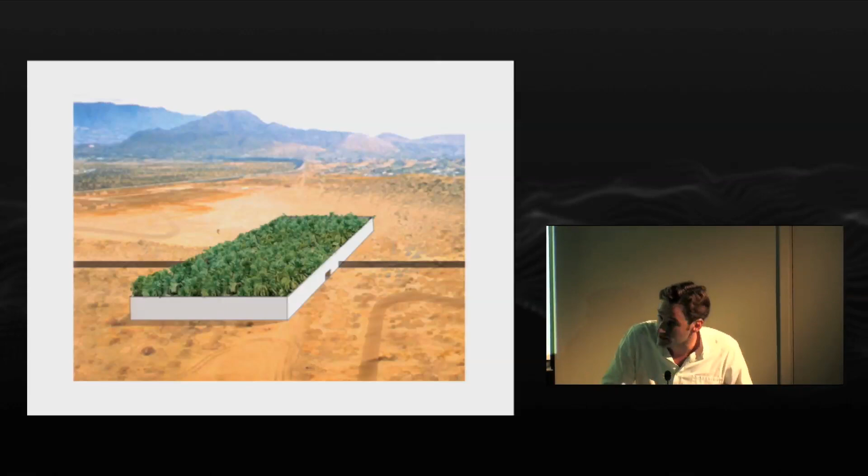So our proposal is very simple. We make a break in this fence and make an even higher wall as a perimeter surrounding a no man's land, the no man's land which always exists between two countries, and where you have one entrance on one side and one exit or entrance on the other side.

And basically it's a wall surrounding an oasis, a grid of palm trees that give you shade. It's also about being very humble and very pleasant. Imagine that space where you would normally wait and queue with your passport being checked. That could happen in the shade of the palm trees in an oasis. We call the project Border Garden,

and it also refers in many ways to almost traditional cities, like in Algeria, the M'zab, where you have the city but also the garden of the city, which is a walled entity, a garden where the minimum of water is used with the maximum effect to really create this lush oasis.

And so, in a way, it struck us that this could be, as a plan, also something relating to the landscape it stands in, this Tex-Mex desert, relating to it in scale, and by making a high wall, higher than the original fence, you could make this space for a border crossing. A question that is mainly infrastructural, you could say. It's interesting to think of infrastructure as being space as such.

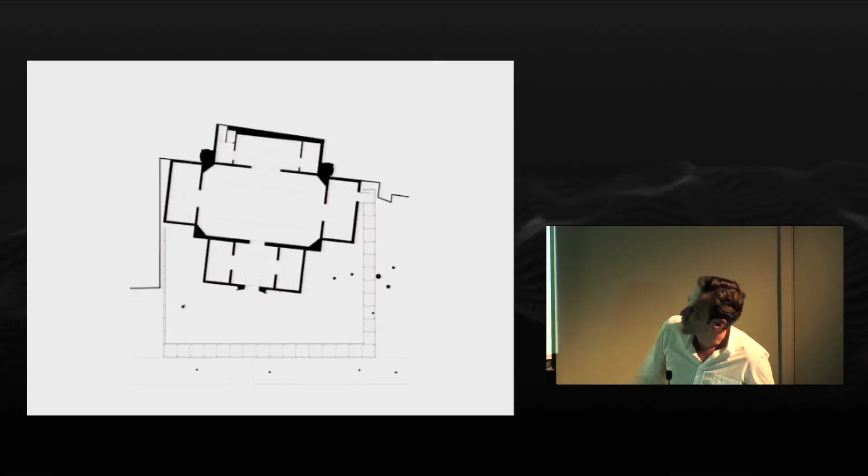It blocked the main entrance to the Giardini, and it made a new entrance. So the door you saw before is there, and you would go through the wall, and I'll tell you about that later, to enter the existing pavilion, come out, and discover a new patio garden.

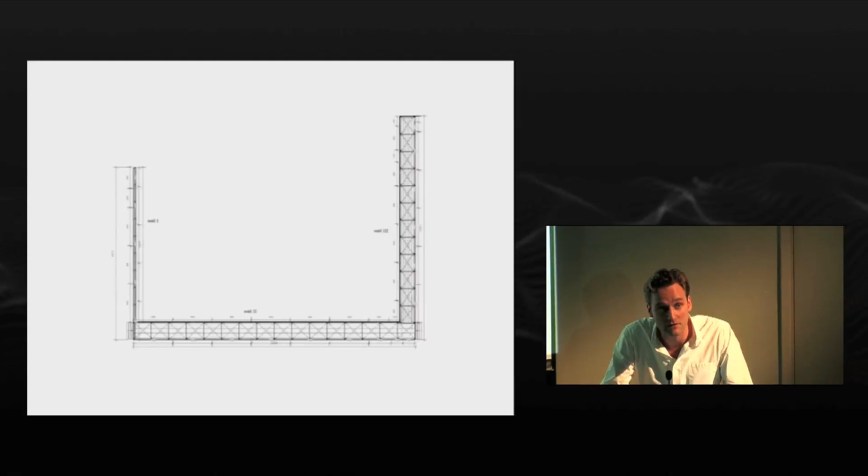And for us, it's very important to say that even if you make an installation, because this is an installation, temporary, 3 months, even then, we think you should make architecture. It should be precise, it should not look temporary, it should be a project really considered down to the detail, as if you would make an architectural project that would last forever. So this wall we made is 7 meters high, and the longest side was 30 meters, I think.

We had to make it there in real. And after the competition, we had to be realistic and really get that ambition that we put forward, get it done.

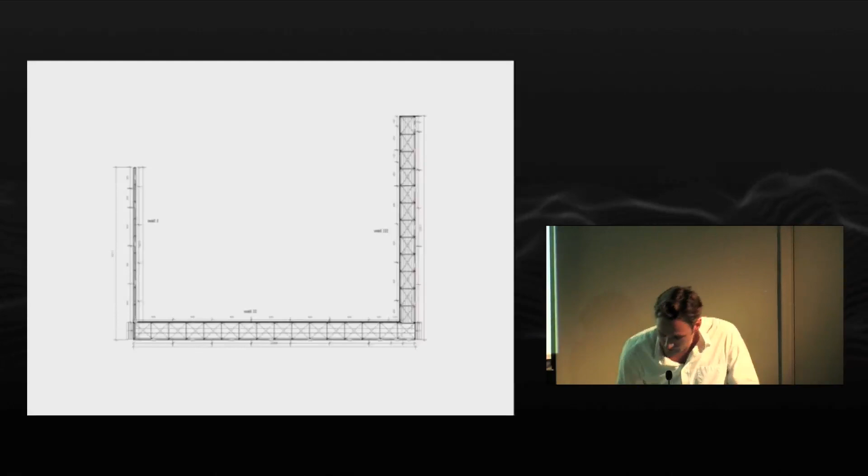And this is a wall we made out of scaffolding, not just any scaffolding. We were in Italy a lot these days, and Italy has beautiful scaffolding. Like Italian cars, they make also beautiful scaffolding. And so we discovered this around all these monuments in Venice and Rome, and the scaffolding was amazing. We decided, let's do it with the scaffolding, but let's make a piece of architecture out of it.

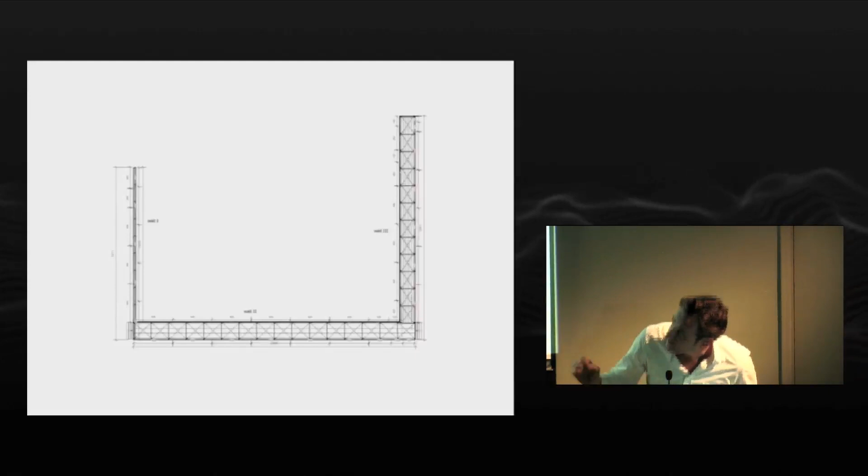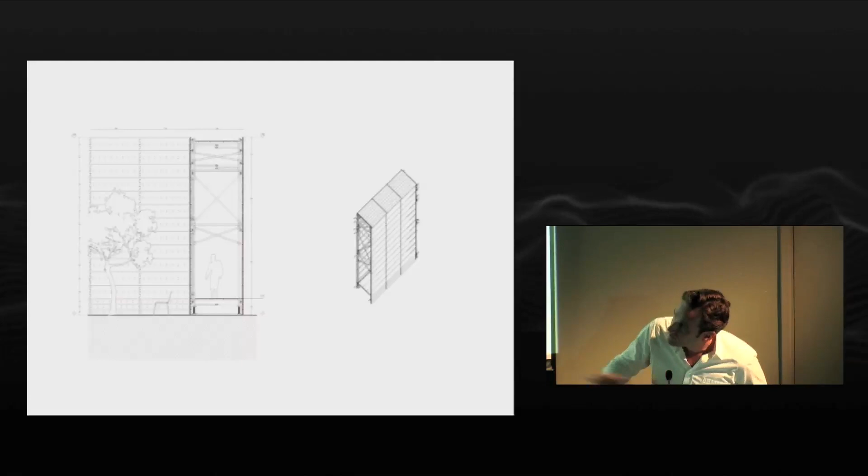And this is the plan, or let's say the modular plan of the scaffolding, making a wall which has a thickness which you can walk through, which becomes also the real entrance to it, but which then has been dressed by these walking boards, which are normally used for the scaffolding to walk on. These galvanized steel walking boards became also the final cladding or facade of the structure, making it into this box.

And obviously this thickness of the wall also provided its stability towards wind and so on. This is the inside image of the wall. And after walking through that wall, you would come in this space, a set of spaces just empty, nothing else except for space. Openings, white walls, chairs scattered around, and confetti on the floor. And walking out, more confetti.

This confetti, it's a funny anecdote, but within that whole new project for the Belgian Pavilion 2010, we were looking for a pragmatic solution to cover the complete floor of the new pavilion, and how to do that in a temporary way, not to get extreme and make a new floor. No, we were wondering for something that you could throw out and it would make a new floor, and confetti came. And in a strange way, and that's maybe important to say, it also finally gave the title to the project. This project was called After the Party.

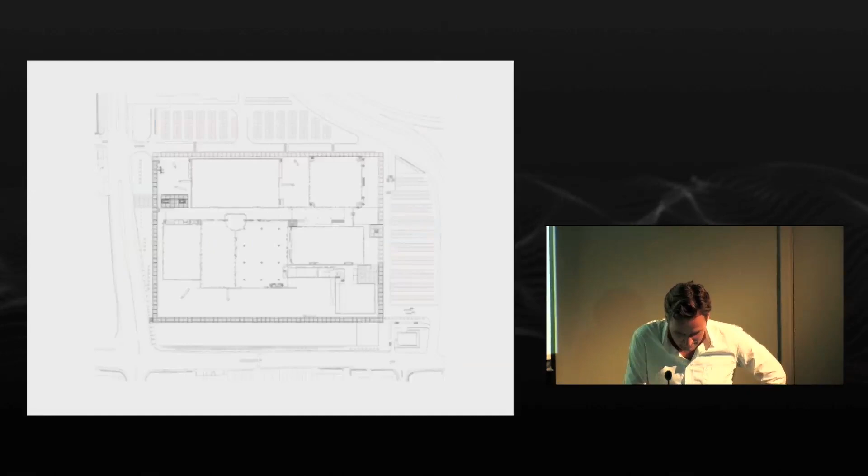That line, if you can see in the plan, is something special, in the sense that this whole complex has been built on a grid size of 5.70 meters, so 5 meters 70 centimeters by 5.70, and this is invisible in the whole building because you add facades and thicknesses of whatever, and you just have a bunch of boxes, right?

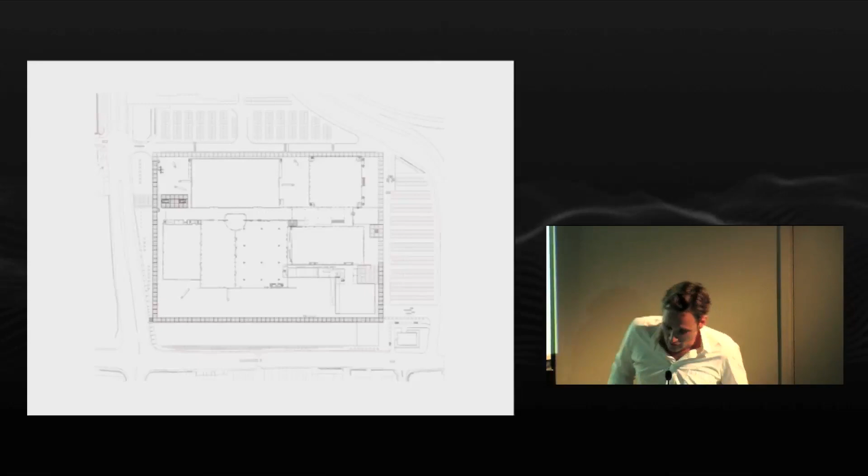So what we decided, it was quite beautiful as an idea that, even from the 60s on, you build a complex always on the same grid, but still you wouldn't see it. So what we decided is, let's make a ruler against that system, or along that system, a ruler of 5.70 by 5.70 by 5.70, all the time repeating this dimension, and putting a column at each of these coordinates on

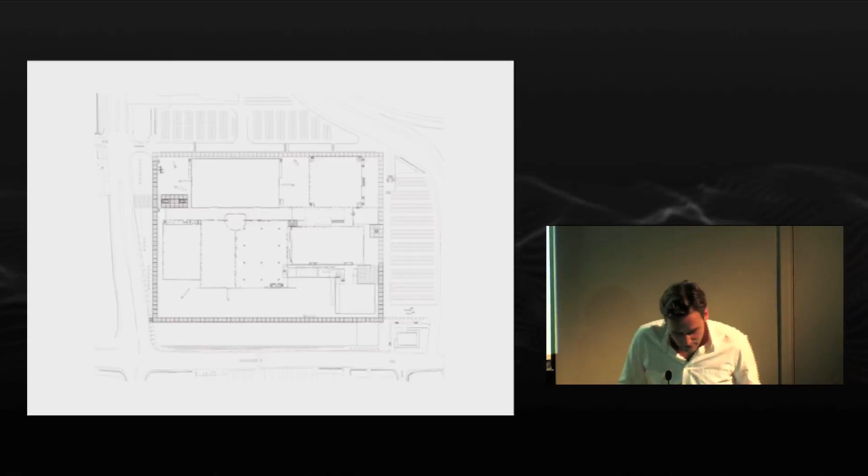this line. So these are all units of 5.70, but here, since we made a gallery just to walk around the complex and to make that frame, we didn't need any insulation or whatever, so we could just make it as pure as just a column. And it somehow measures the complex. It is an inverted gallery, where a gallery normally looks towards the square, or the public space it embraces. This one looks out to the city,

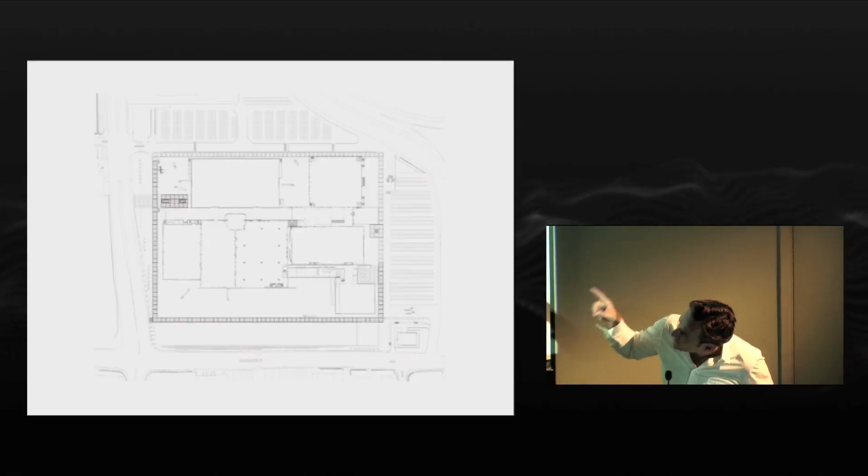and it has a certain transparency going in. So you will see in the pictures here, there's screens hanging in the back, and there's a green area which has also been completely redone together with Bas Smets, actually, landscape architect. But apart from being a line where you can just walk in and which somehow arranges that site, it's also a very dubious line, because obviously when the big fair comes and needs to put extra tents and so on, they would end up in the grass.

But why not? It's almost like a city wall where in the end, when the circus comes, they put the circus outside the city wall and no problem. So that line, you have to also understand as something which is not that strict, and the actual ambiguity of that is very important. Till it even becomes a building where you could buy tickets, entrance.

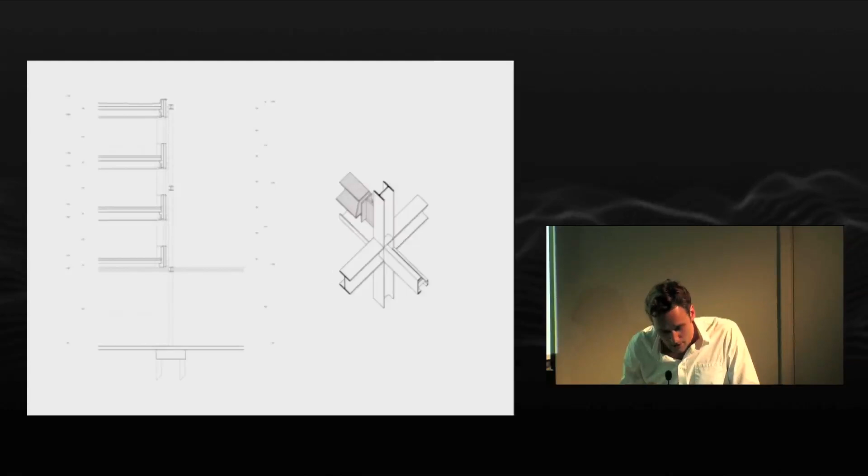And that building, as you can see here, there's the gallery, and at some point they asked, there's extra programs, so what about this extension? There's a new box, the new hall they built, they made new flat plateaus to build up tents and so on, but also offices. And offices, we put them on top of the gallery with this kind of detail. And in this unit system of 5.70, we somehow could fit 3 floors. So one beam is in front of the windows here. And this is the south entrance of the complex, underneath here.

The north entrance is due to get also a similar building, but then standing straight as a tower. But then again, maybe it's not so much about that. It's really about creating frame and content. This perimeter framing in very different ways, very different situations. This is also a hall that we have built behind the perimeter, because that's where you could still build. But it's just part of the set of halls. It doesn't have extra architectural value apart from being at the right spot.

Okay, I'll maybe have to speed up a bit.

Belgium also, a house. Belgium, and it's maybe good for you to know, Belgium is a very densely populated country. There's 10 million people or a bit more. And especially Flanders is quite a small area with 7 million people, something like that. And so space is really, we're running out of it. And each person has the dream of having a house, a single family house, a villa with its own terrain, and that's what's obviously taking away all that space. So there's endless suburbs in the whole of Flanders. Actually, it becomes almost a continuous city.

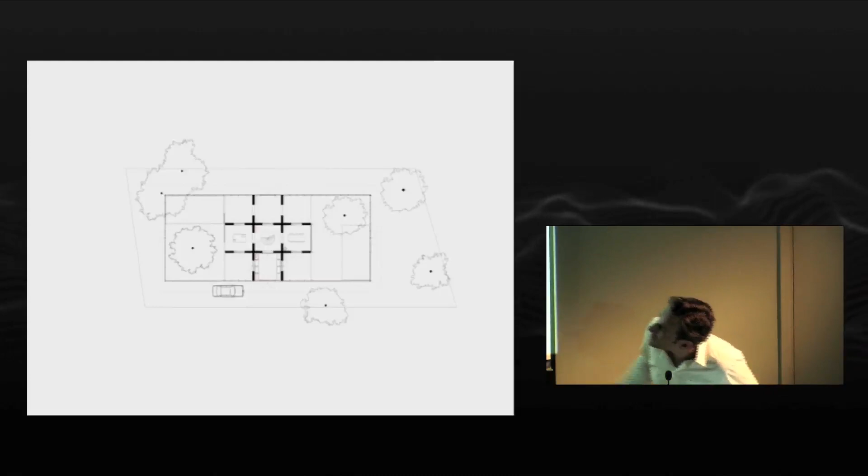In our idea, we wondered if it couldn't be interesting to give back, in a way, a piece of the site and put a fence as the first house inside the terrain. So this is the private property, almost giving back to wilderness, let's say, a part of your own site. So the perimeter defined on this lot is actually the fence, but also already the house.

And you could almost, as in Villa Savoye, drive around it as on a little farmer's road and go back out. And the actual door of the building would be on the side. You had two entrances. One is a back entrance and one is a front entrance, but they're both on the side.

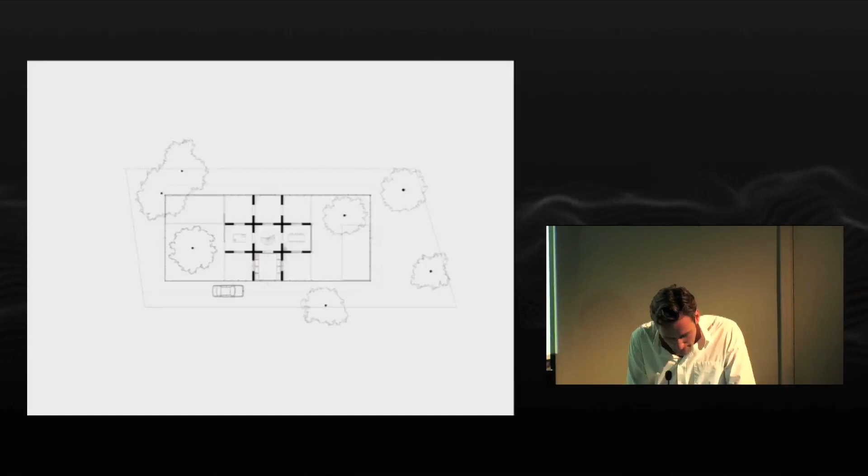And maybe as a side remark, inside that fence we made that ideal plan, that ideal villa, almost as Villa Rotonda of Palladio would be the ideal dream of, let's say, a villa in the landscape. So the plan inside this fence is very simple. It's a set of 9 rooms defined by this cross of walls and openings.

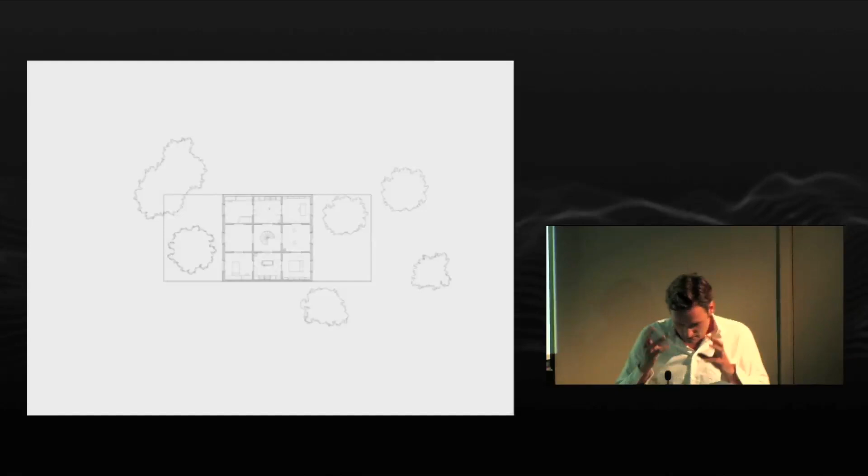And on top, there's another house. There's, let's say, the roof house, which is the same plan, with 9 rooms, with a central stair, but which has the outside wall also built. And these 2 universes are also fundamental in how we think about how you live.

So the first house is a stone house. It's made in a very mineral way, being framed by these 2 patios defined by the fence. The roof house is made entirely out of wood, almost as a roof put on top of the stone house, but with the same plan. And actually, living here is completely different from living here.

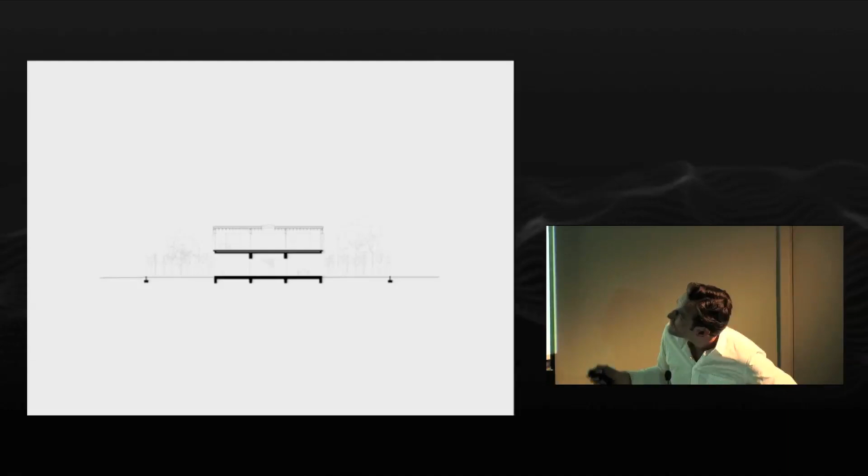And here you are in relation with these patios defined by the fence. And then again, outside, the wilderness, let's say. Here you have the view over the fence, towards the fields and the forest. And the fence is grown over by a climbing plant we discovered in the forest. I forgot the name, I don't know it in English for sure.

And the house. So the house is super open below and quite closed, but precisely perforated at the top. And in all its design and decision making, it is a complete universe of experiencing this as your space of living. On the ground floor, the windows slide completely from here, which is the kitchen, to there, as an add-on. So you don't see the frame when you're standing in, you only hang it on the outside.

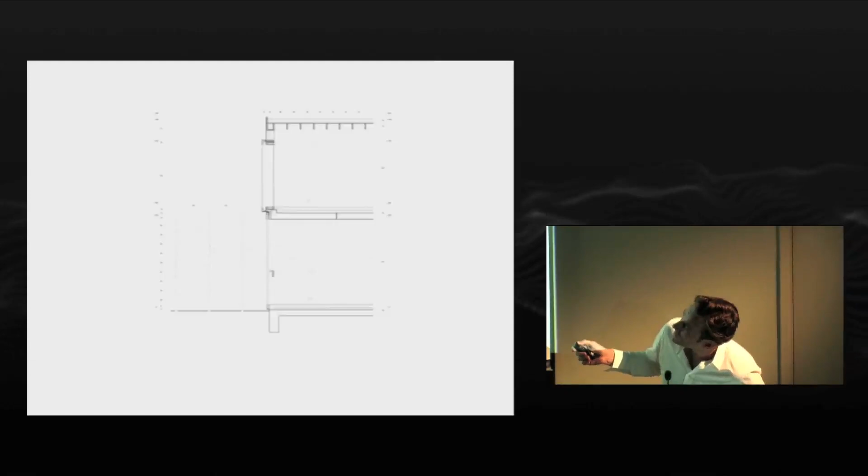And the same here, the openings, which have these panels to close off for the night or for light, are similar to doors in all these openings. But then again, the windows are glued on top, so there's no vision of a profile. And these kinds of things are very important for us, in the sense of how can you design a window that fits with this idea of rooms that have openings. And openings mean, in this case, no profile. So the profiles sit in front, as you can see.

And some of these rooms are just outdoor, like these. That's the entrance situation, 3 rooms in a row, an enfilade, connecting 3 spaces covered, but outdoors. And indoors are these spaces. And then we go up in the wooden house. There are living quarters downstairs and upstairs. There's an idea of a very essential way of living downstairs, very bare. And upstairs there is a certain comfort or warmness. Maybe you're here more in the winter, who knows.

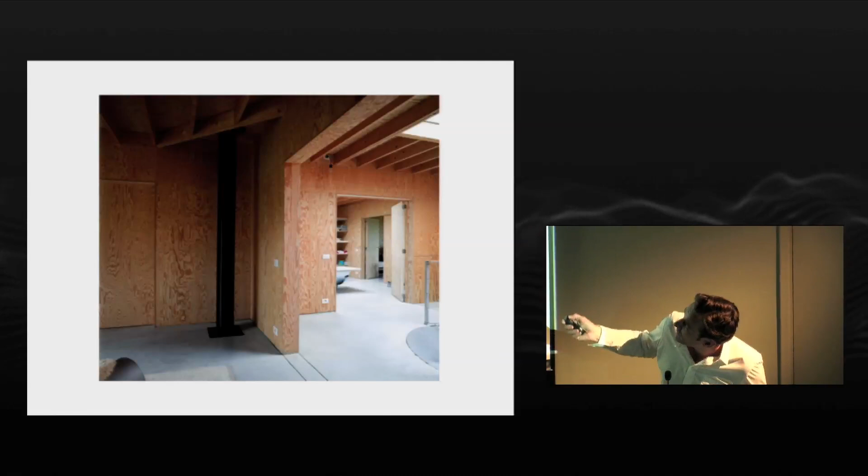And even bathrooms and bedrooms just fit in this system of rooms. And then again, the fence making its outside. Also funny is this window. It had to be able to slide completely open and had to cross the fence. So we made this kind of cantilevering, not that difficult detail. But that's the consequence of the design. Why not?

Rooms. Obviously the previous project could be perfectly in this chapter. This is again Belgium, Merchtem. It's a very small city, almost like a village, but its status is very unclear, like a lot of these little towns and villages in Flanders. And this is a funny project because the clients are both dentists. The guy is originally from Iran, but has lived all his life in Belgium. And they somehow inherited this house.

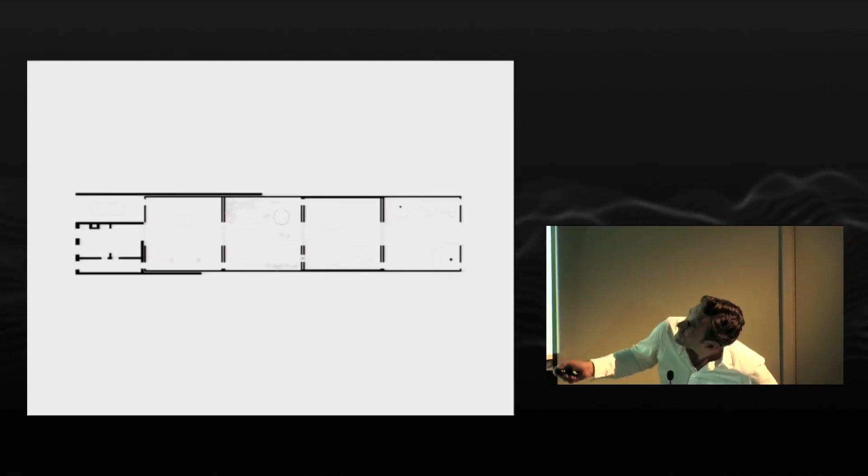And this is the final project. So, as I explained, these sites always have these long, narrow strips being somehow gardens. And this is the original house. So here's the street. Here was a carport, we broke it down. But mainly, here was full of these sheds in the garden. And we said, okay, let's tear down all the sheds, just save the little house standing at the street side, and make a new house, the weekend house. And the weekend house would be actually the complete garden.

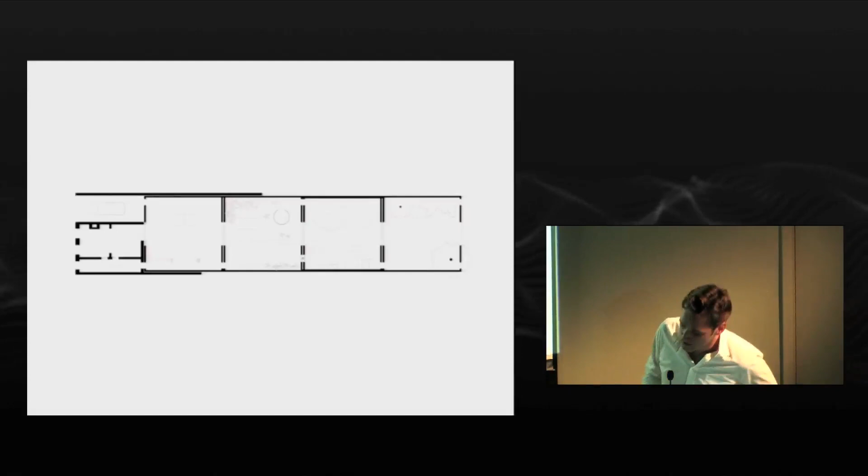And in a strange way, we discovered it's 40 meters by 10 meters wide. A sort of a measure system in there. We could fit in perfectly 4 square rooms. 4 rooms that would make that weekend house.

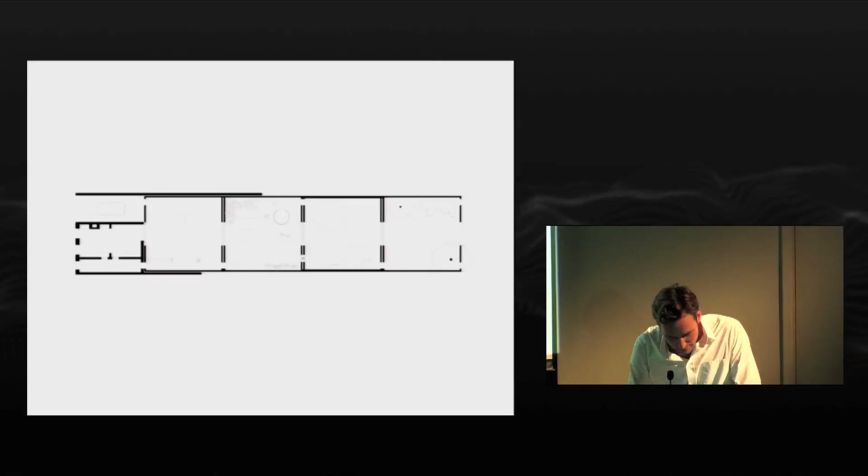And in section, this is again the original house, the street, you could have a sequence of different universes which were completely yours. In the back of that Flemish, depressing situation, you could have your dream coming true. And each of these rooms, our garden, our house, our space. So 10 by 10 meters, each of them. And they have a roof sometimes, like this one. This is, let's say, the main covered weekend house space.

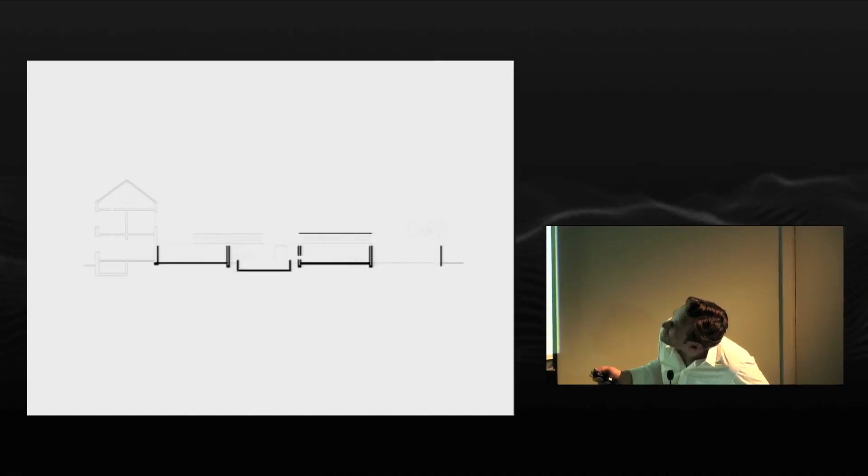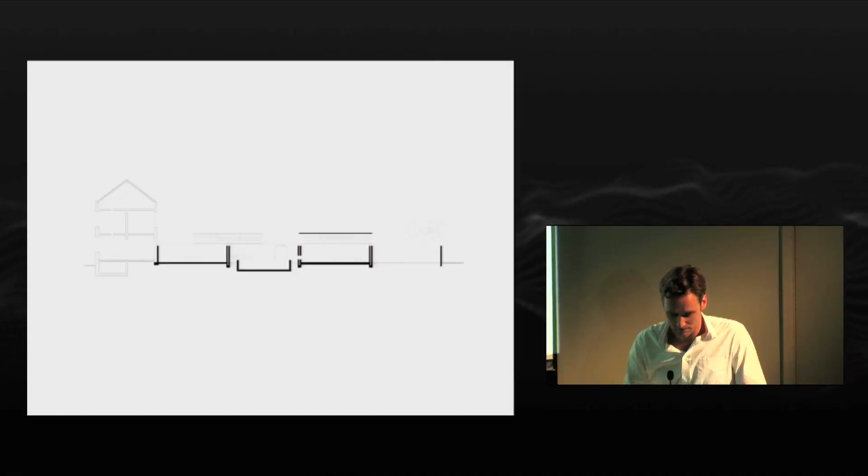But this is the pool. This is the first patio room next to this house. There's a roof, this one, that can roll from one room to the other. So, depending also on seasons, you could make this into a very compact house with a covered pool, or in summer or spring, you open up this room almost like a convertible car and have an open air pool. And in the back, there's a very traditional, let's say, Belgian or European garden.

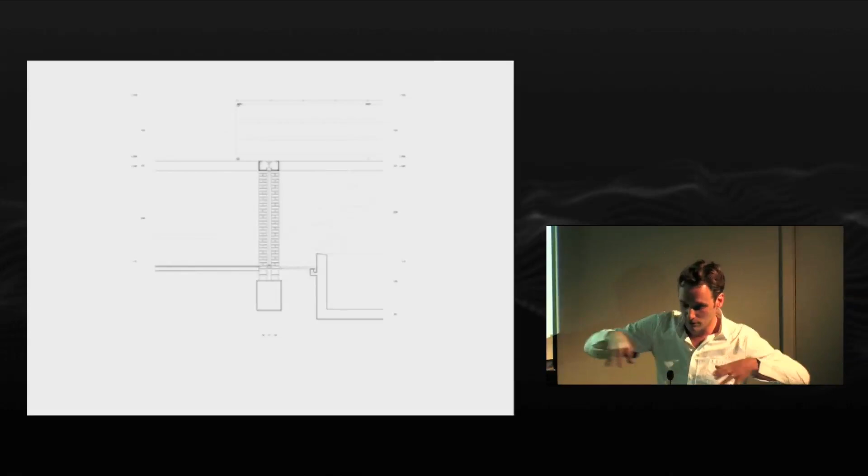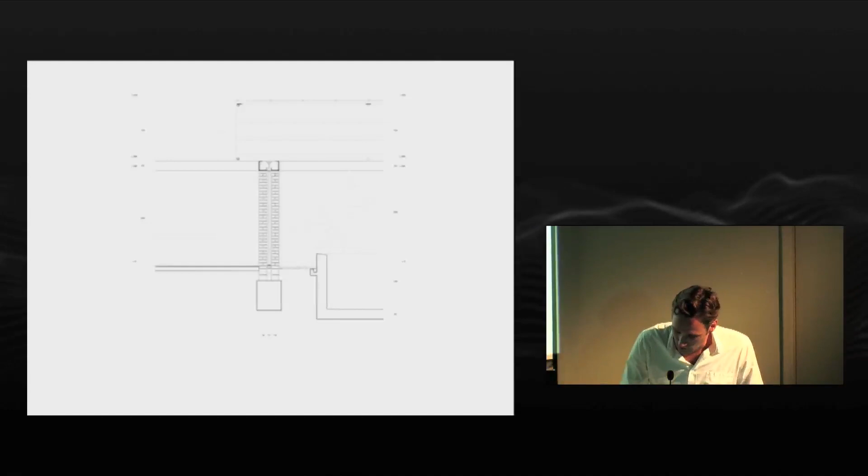So all these details, in a way, we like the idea of very pragmatic, in the end, solutions to quite ambitious projects, like a sliding roof or disappearing walls. It doesn't have to be that difficult, actually. Could be quite industrial, even.

So even this is the room where you can sleep. There's also a kitchen and so on. And we were faced also with the idea of rooms. We made a lot of projects with rooms. The previous project you've seen, the house with the fence, has rooms 4 by 4 meters. This one has 10 by 10 meters. So when is a room not a room anymore? It's interesting. So what we decided is at 10 by 10 meters, it needs something like anchors of gravity to hold things in that quite big space.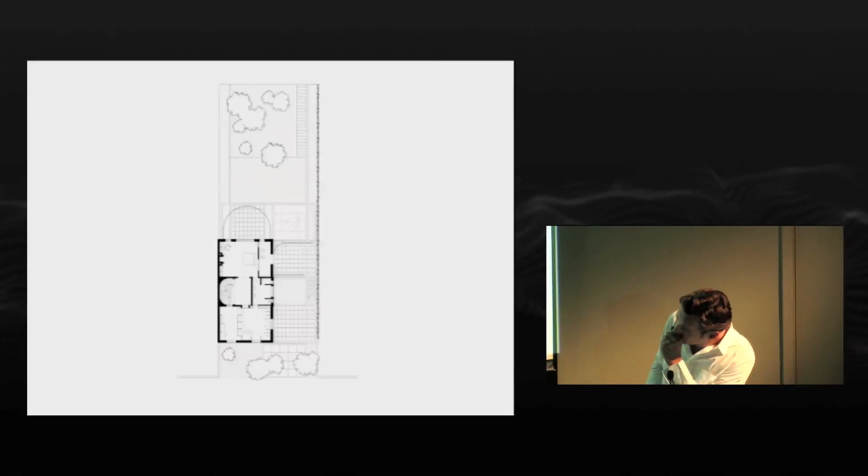And the house on top stands on that system. And the system of these columns and rooms, somehow it reminds me of the paintings by Mondrian he made when he went to New York, Boogie Woogie. So you have these lines of Mondrian, but suddenly he made them into dots, like the lanes of cars with traffic.

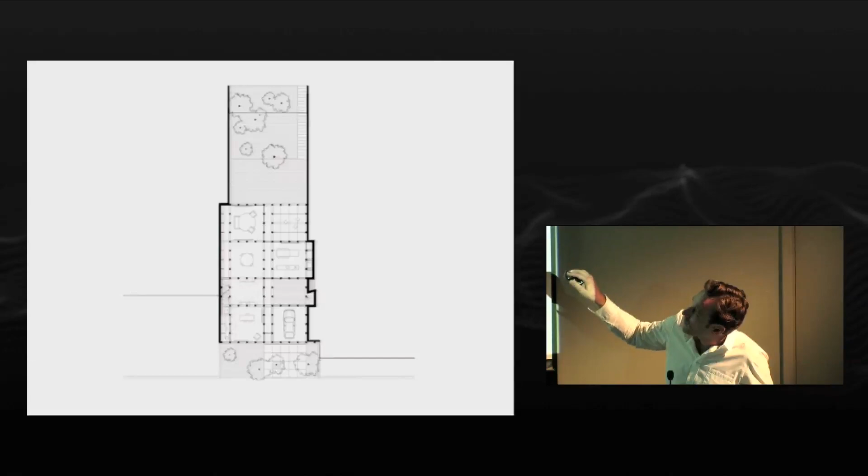But here, these columns, they define rooms, and rooms making almost a measurement of the plan of the house which is on top, which sits here actually. And other rooms popping out, being outdoor or being indoor. And there's also something happening.

There's a mix between columns, because we were puzzled by the fact we wanted to make a concrete column house, but then you have the problem of how do you put glass. And again, maybe, I don't know, it's reappearing, coincidence or not, we wanted to put the glass in between the columns, but have no frames. So we decided to mix actually two types of columns.

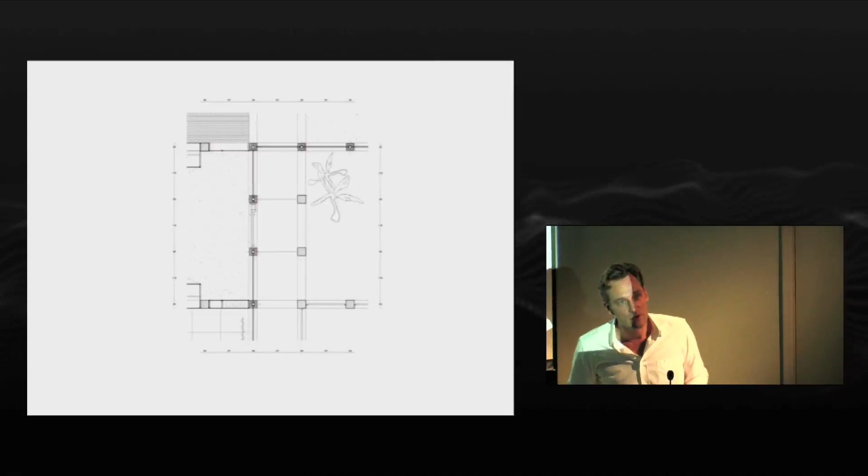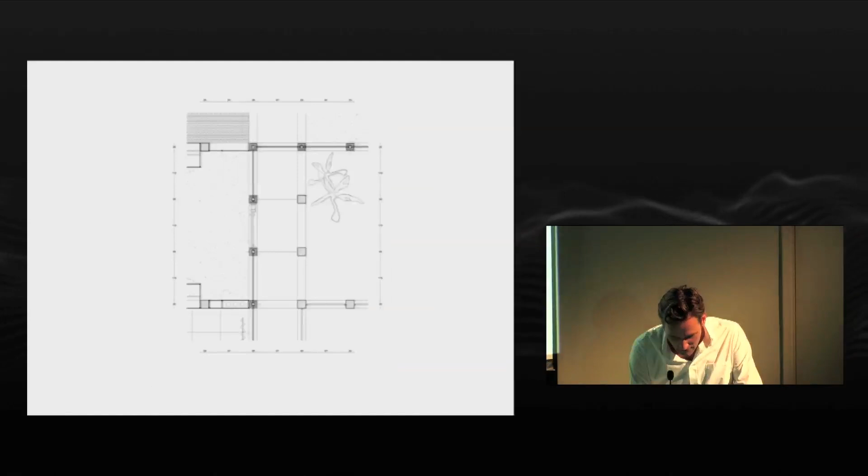You have a concrete column supporting the house, and you have wooden columns being able to take the glass and sometimes supporting also the house by reinforced part in steel inside. But so there's this kind of mix of columns, and both of them, that I would have to go back here.

This is a wooden part, and this is all made out of concrete, again with a wooden door in there. This is the garage, by the way, and this is the living room, kind of. So that mix in the plan is not visible, and in detail it becomes visible. And then again, also, almost as a Roman villa, you have the columns defining the rooms.

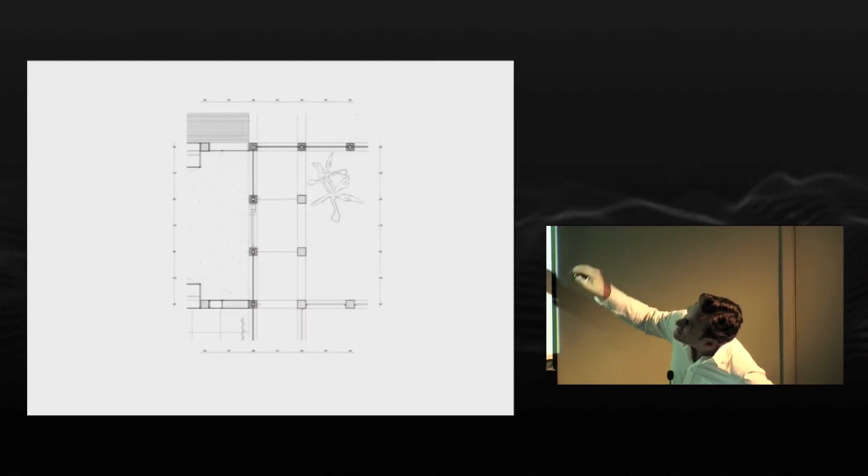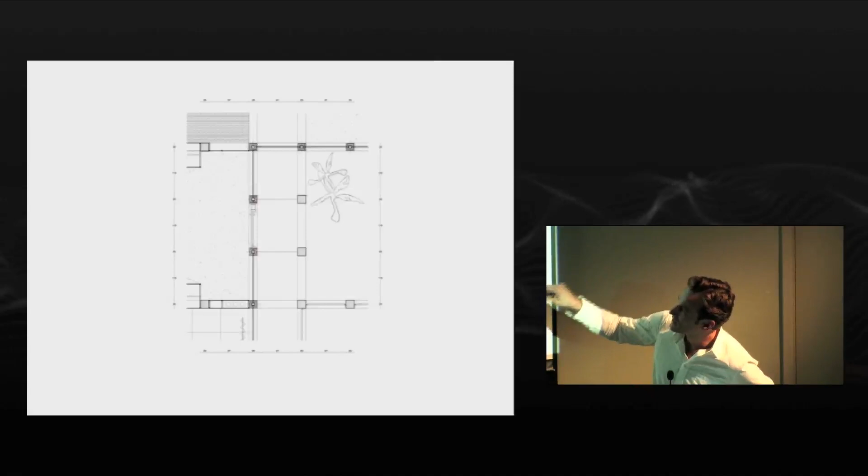These infills of the floors, they're always different. They're all of a similar tonality, so they're brownish, but one is terrazzo, one is big concrete tiles. There's a piece which is a patio. There's a polished concrete again, a leather floor, a wooden floor, terrazzo again, tiles, and so on. So these switches we liked.

And this is a funny part, it's the garage. The garage has the most, let's say, luxurious finishing. It's the marble cladding. So when you're inside, you see the light coming through. But at the same time, it is also, in a way, from the living room, you look at it. And it also makes a block between, let's say, street and inner courtyard. There's a kitchen next door, and so on.

So it is, in a way, a very strange block that also works as you're inside, but actually you look at it all the time from outside also. And then again, that system. Here, this is indoor still, but here, these chairs, they stand outside. These are living rooms where objects just stand, and again, a mix of columns. So concrete columns, these are wooden ones, concrete, and so on.

And sometimes the ceiling goes up a bit, and the floor is flush with these beams even in the ground. Sometimes this floor steps down here, and the ceiling is straight with this horizon defined by the beam.

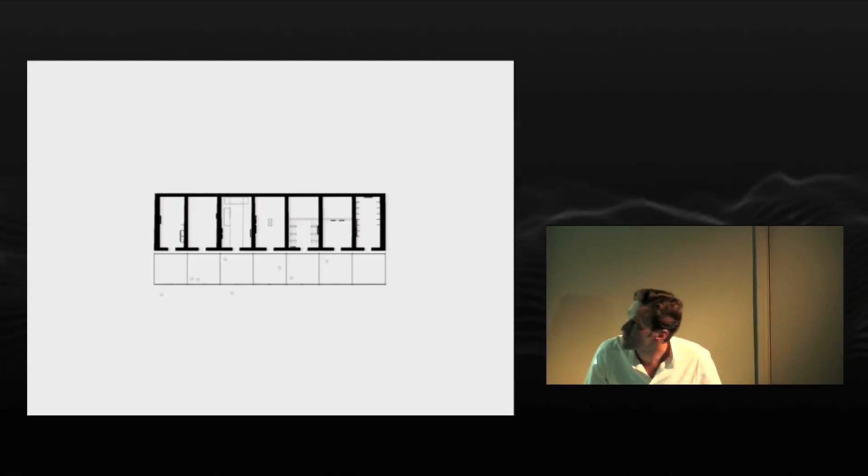So the plan is simple. Well, it was simple already when we started. This is the existing building. It's 7 rooms in a sequence. And it's an old warehouse of the army, some storage building. And quite beautiful in a way, very simple, with these doors each time, entering it from that existing garden. And that garden had grown really against the building.

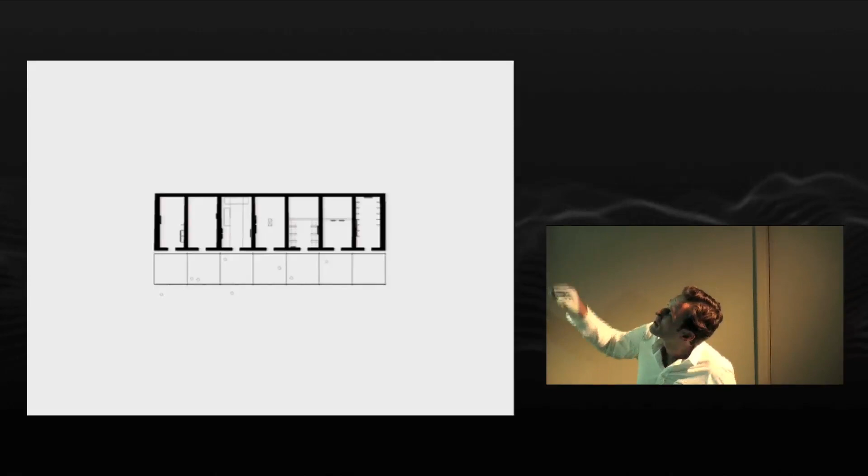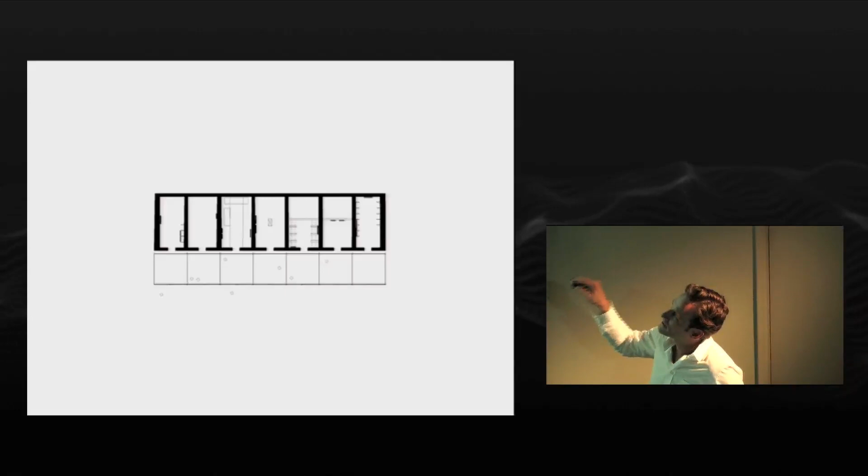What we decided was that somehow the building still needed an idea that you could see it, at least, in the back of that garden. And also, what we liked is, could you make something that connects all these rooms and all these doors coming out of them together? And this is our intervention, actually. It's a big canopy in front of the existing building, giving it a garden canopy or a terrace in front, which would also connect all these rooms together.

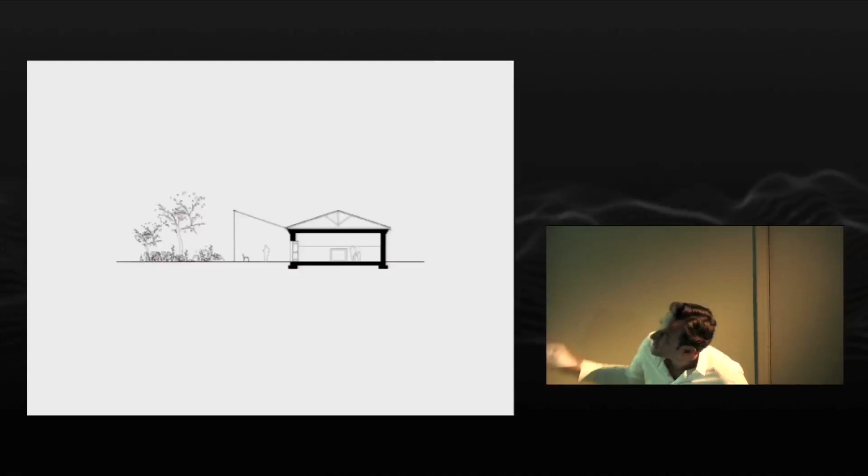And inside, we didn't show much, but there we decided that we could show work of Bas as well as our collages. And the canopy was very simple, no budget, but still, why not? A super thin column, a super thin beam, and there is just this very light membrane on top. And it mirrors this angle of the existing building. It's half of the building, basically.

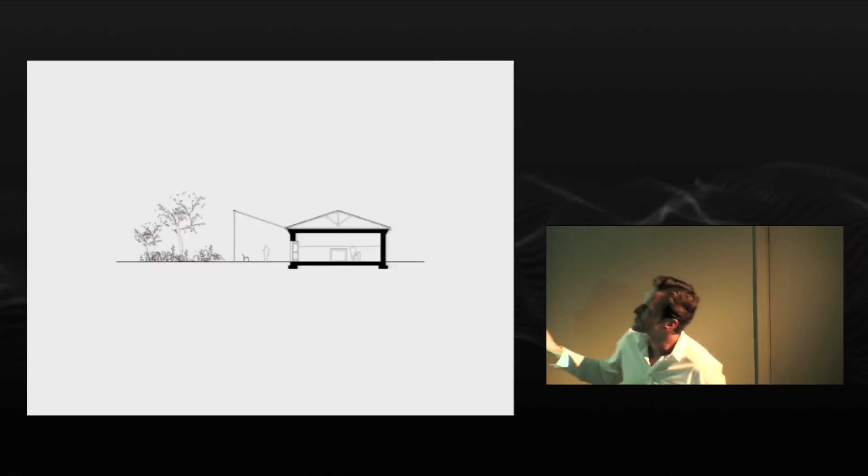And there's the garden, which we had to clear completely, so we were working there 2 weeks with a team of students and employees of ours, completely in the wilderness, really. But it was beautiful to be there, and so this is how it looked. This is a bit an example. That was a neighboring building, but it looked not entirely like that, but almost.

So we cleared this bush and then had the gravel that the biennial lays out everywhere, had it until our pavilion and even till our neighbor, and it made that space here. And this is the existing building. That space that you could access and you could see already from far away, and it would just open these doors.

And all interventions in this project we decided would be similar. So you had the existing building, but all the extras were actually made out of steel, white painted. So you have a chair, you have a column, and you have a plate.

So all the images, considering Venice, it's very humid conditions in summer, we didn't want to print on paper and then hang our images in frames or something like that. No, we just said, okay, let's paint steel plates. Actually, they're aluminum, but metal plates, paint them white, and go through an inkjet printer with them and print the image immediately on the paint.

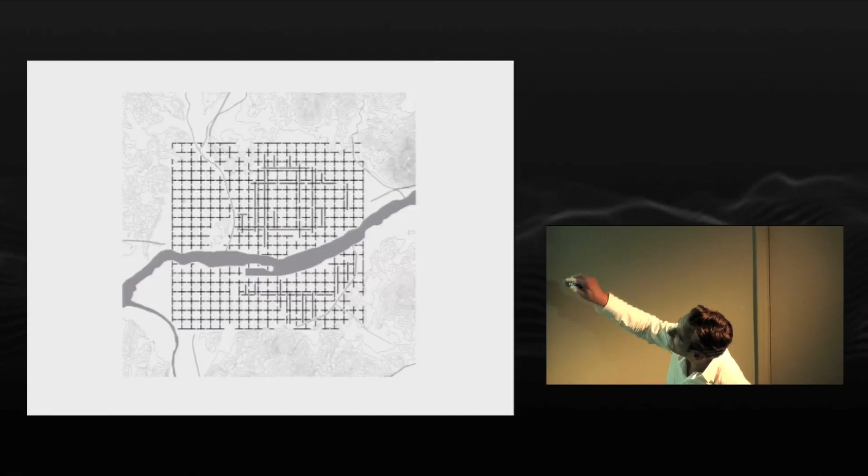This is a view from the mountains to the valley, and you see a city being designed as a grid that we implemented inside this valley. We didn't build in the mountains, so the mountains were cutting a bit away from the grid. A city of 3.5 by 3.5 kilometers. A city defined by a grid, but not the traditional grid where the streets define blocks, not the Manhattan grid, nor the Cerda grid of Barcelona. No, this is a new type of grid.

It's also for a new city. 2025 was the start date for building. So how could you think a new city? And a city that, from the moment you start building it, could be somehow spatial, not be just a piece of infrastructure. Again, that switch from infrastructure to architecture.

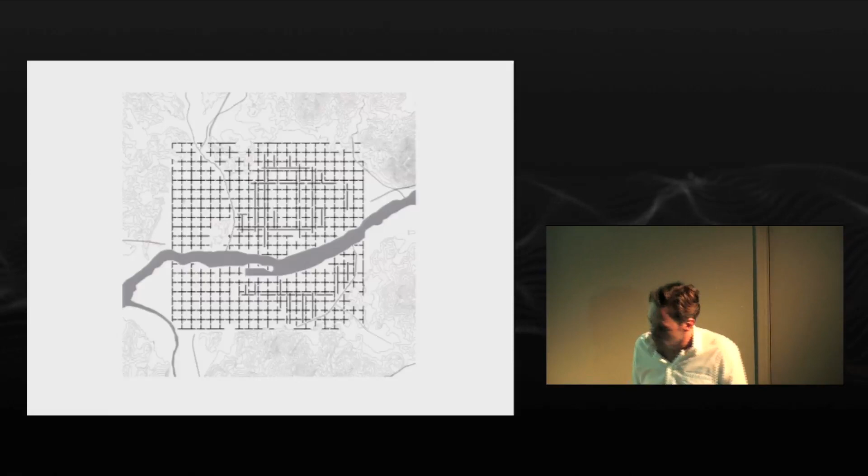So what we decided was, let's not put the buildings between the roads. No, let's put the buildings on top of the roads. There are no roads, they're just buildings. So basically, these lines, they're all built mass. And they create rooms, city rooms. So by making city walls, you can make city rooms. And each of them could be a very different universe.

Because actually, with that program, imagine 500,000 people, how much would that take in square meters? We did some very basic mathematics, not complicated, no diagrams, just a little paper where you say, okay, maybe people need per capita something like that in square meters, including public space, public institutions, commercial space, offices, and so on. So we decided that half of the city could be built in these walls.

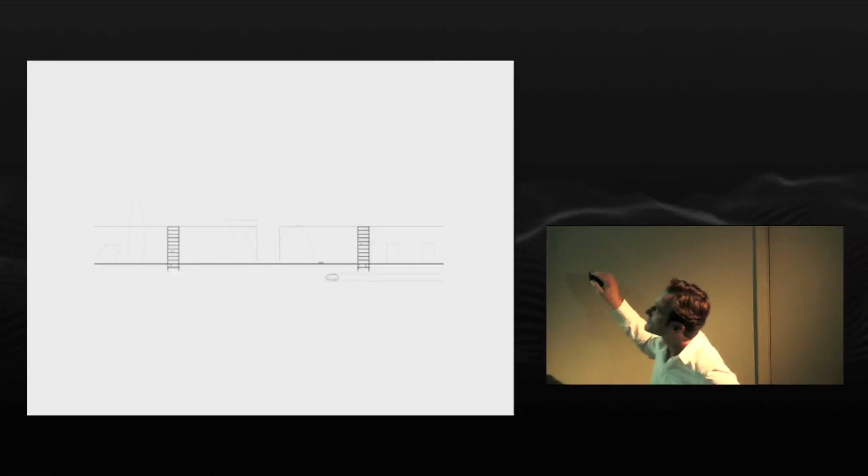Walls of 15 meters thick, more or less, making rooms of 180 by 180 meters. And these could become like parks, but could also become neighborhoods or even other developments. And in their height, 10 floors, they would frame and make rooms. And actually, no cars would be there because there is an enormous extended metro system connecting almost each room with each room.

And it's funny because if you think of it, the city could be almost like a house, just the extreme big version of it, where, as in a house, you walk from living room to bedroom, etc. Here you would walk from the room with some development to the park room next door, and so on. And actually, what was defining the city, we deliberately cut away out of the image because it became its background. These white surfaces, obviously they wouldn't be white in reality, but why not? It doesn't matter. These are background to what was almost the actual furniture of the city.

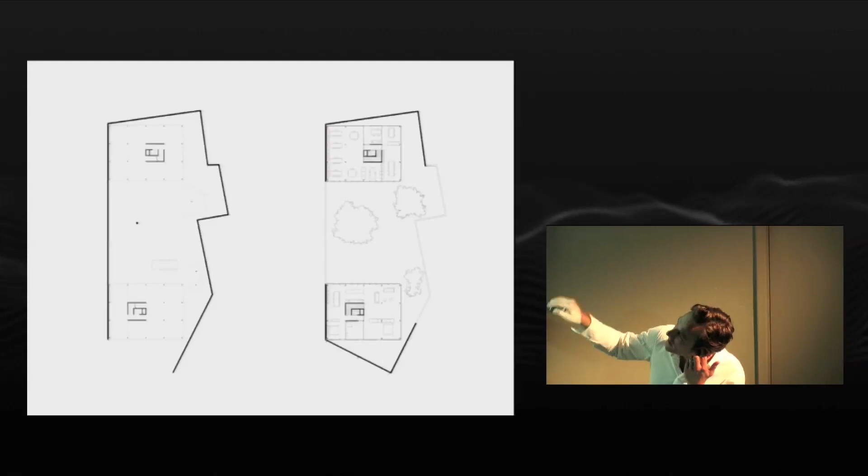And then inside it, we decided to put two buildings. One in the front at the street side here, the street is going like this, and one in the back. Identical buildings mirroring each other over a court that they define. And all these margins between the crazy shaped wall and these very rationalist buildings are very important, because they start to add to the project what it could not foresee itself.

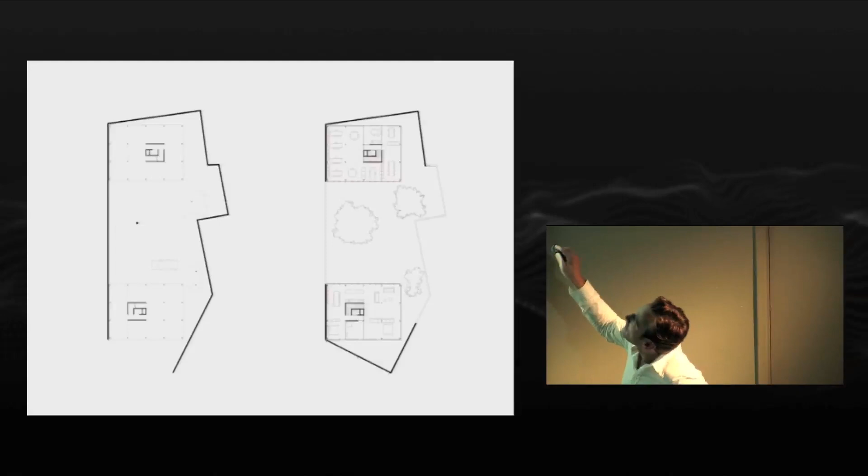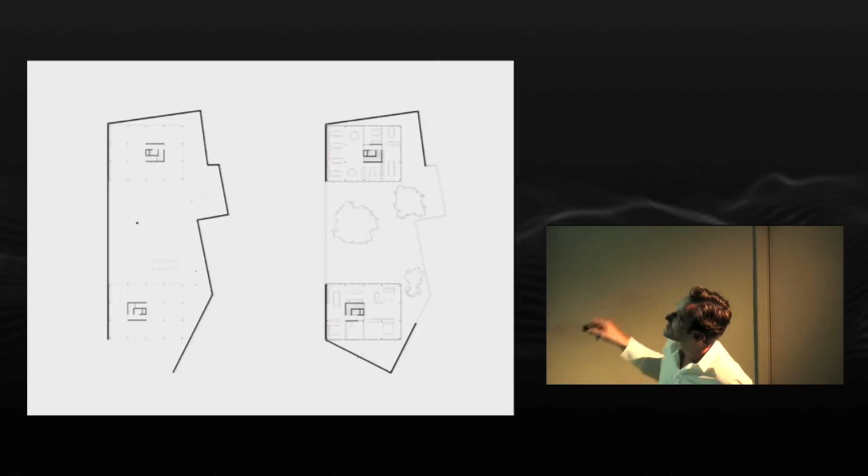On the second floor there's an apartment and some more offices, and there's a store here, the computer shop. And here we could build up the walls to two floors high, only here. So here it's almost like a garden wall. These are two floors high. And here you see the wall as if it unfolds from the volumes. That's also how we designed them: because this wall is made of brick, we could make these very light, because it already had its first protection, its first interior.

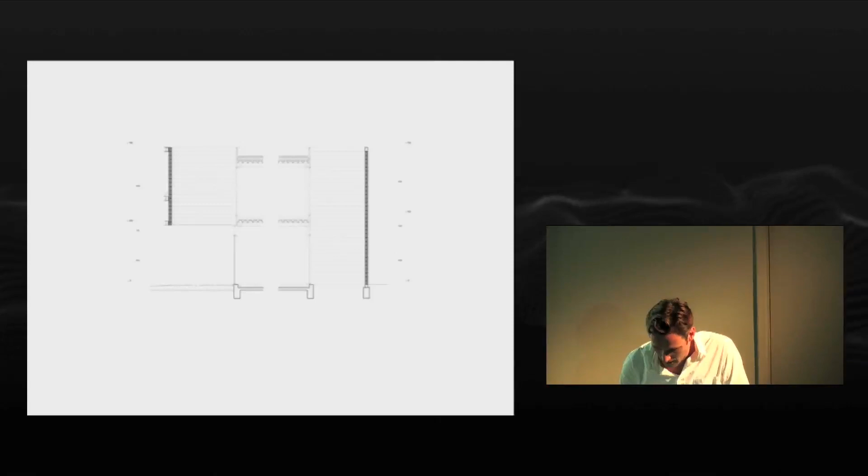So here you can see these walls painted white on the inside, and these boxes, the actual buildings with the program, are very lightweight structures with a steel structure and polycarbonate cladding on the facades. And sometimes you get glass facades, where you have the store or the shop. Again, some details. I'm not going to go into that, but a very lightweight steel structure.

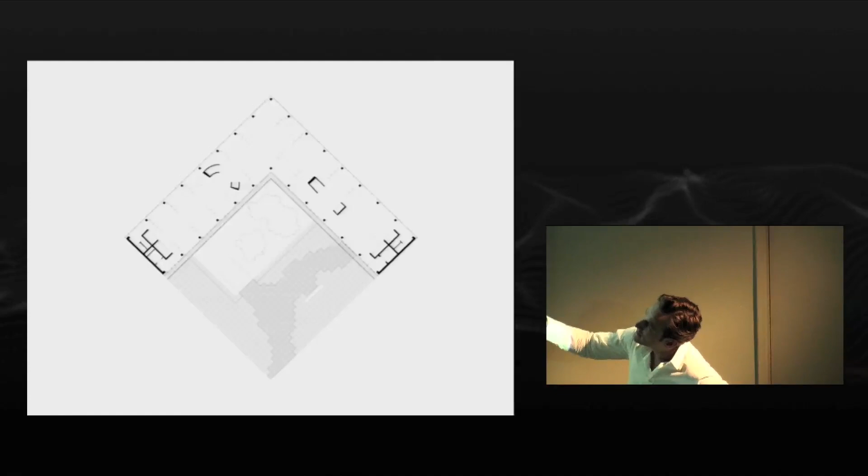And the front, and this is the actual orientation of the plan, meaning north is up here. The front we could completely glaze because it was facing north, and we didn't have a real problem with, let's say, solar protections. Again, in the back, we had a bigger problem. This is the south. And actually, this building has two sides, so it's almost like the Roman god Janus, who has these two faces.

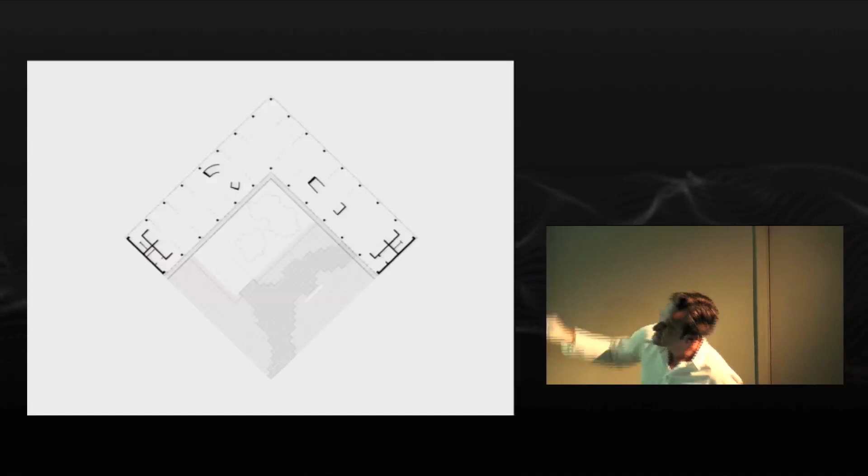So the face to the street is this completely glazed building. The face to the garden we actually defined as a more closed building. It's almost a corner embracing this deck and also opening up to the garden. And that we could do also because the terrain has a slight slope. So you enter the building on the top of this floor, which has a patio here. And this facade is completely different.

It has been dressed by steel screens that could also become finally the floor of that same universe. So it's really like an XYZ Cartesian space defined by a very narrow building made out of glass, and these grills protecting it from the sun, becoming also the floor to enter the building. And inside, as I said, it's very bare, you don't hide anything, just concrete slabs and some stairs and offices, obviously.

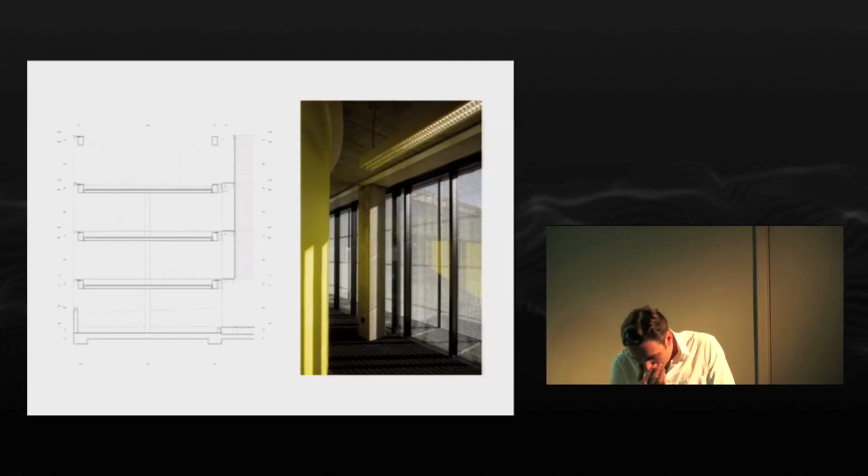And the stairs, maybe the last thing is the stairs. They're the protagonists inside. They become very important because there are two stairs in the building. One is a straight stair sticking through all the floors. Another one is curved like a corkscrew, the same straight stair just bent, and standing also almost as being part of the furniture, but still being the stair in that space.

Also, this is a structural stair, so it's made out of concrete, as these floors are, but prefabricated concrete put there, and even the floor slabs are resting on this edge in metal that the stair carries, and the stair brings it down, and there's a metal beam underneath, which is the same one you can see here. So there's another stair standing on this beam. So this goes through the whole building, and again from the street you just get this.

And what is funny also is that even outdoors could be in that building. So there's a big patio here behind the glass. The stair goes up, comes outdoors here. The, let's say, executive floor or the director's floor has a private outdoor space. But even the machines stand in the same logic just behind the glass, like these pieces of furniture here and these cupboards and tables. Very normal things. Also, the machines stand like big cupboards behind the glass.

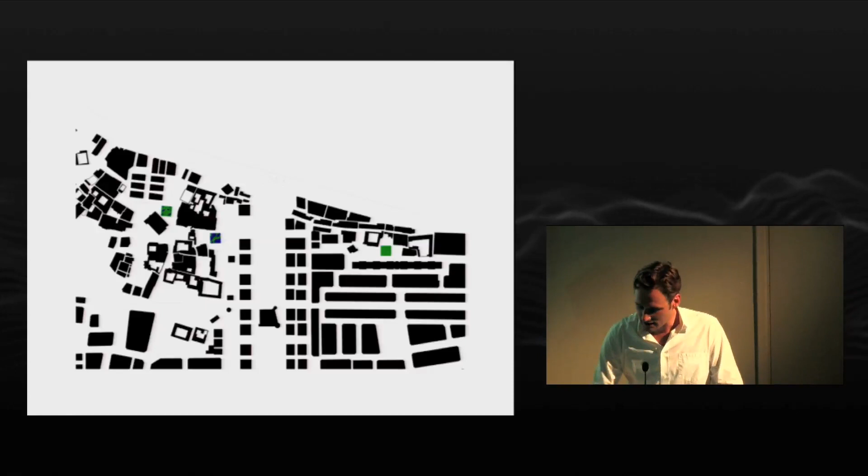Because public space in the Middle East is a very strange thing. It's not like we know the squares and streets. Public space is very different. It's almost always indoors. It has a certain privateness, but it's still public. So in this labyrinth, as these old city pieces are, sometimes you could find big courtyards, like here. Sometimes they're mosques, sometimes they're palaces, and so on. But they're extremely beautiful, hidden places in this maze, which is the Arabic city.

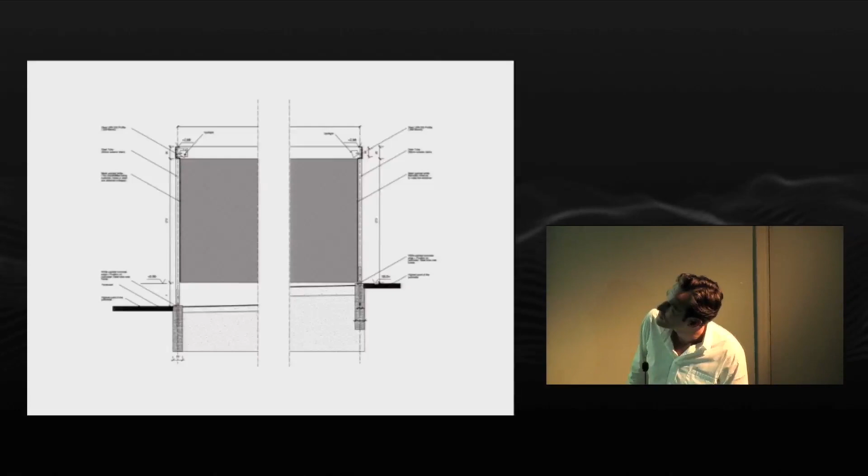And in this big void left from development, we added three new structures that would fill these voids and make new buildings. But the buildings themselves are actually very thin perimeters with inside gardens, each of them slightly different but actually almost the same, filling up and again creating these tensions of the maze towards the existing building. And the dots you see are actually palm trees. This is our project, a collage we made of it, some technical detailing. And this is the final result.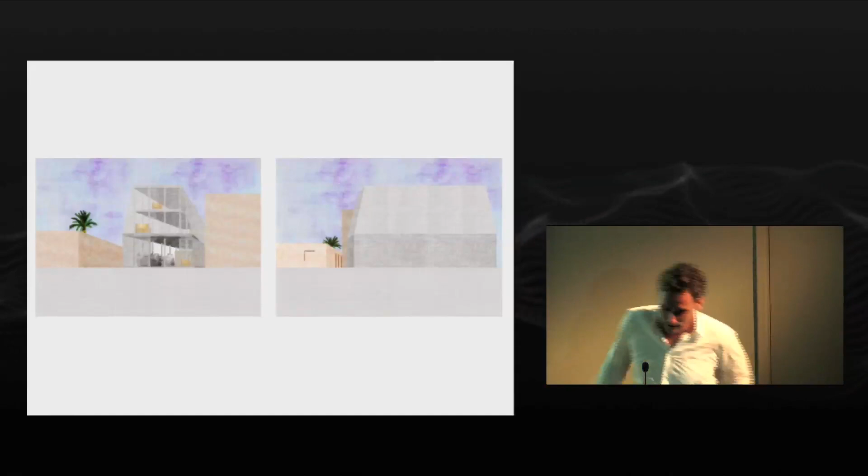It's for them and also for the city. So how could this traditional music survive and still be vital in this maze, vital on even a level above local? And these are projects. These are two images for one of the projects. And as you can see, it's a box. The existing is a very low building, 1 floor. This is an addition to the existing, and they somehow have a relation.

In a strange way, the dar, as a typology, it's the typical space where rooms, and we discovered we're almost like Arabic architects, traditional ones, where rooms were just put around a court, one next to the other, with a palm tree in the middle. That is the house. That's the typical house from that time, old house, I mean. So how could you add something to that?

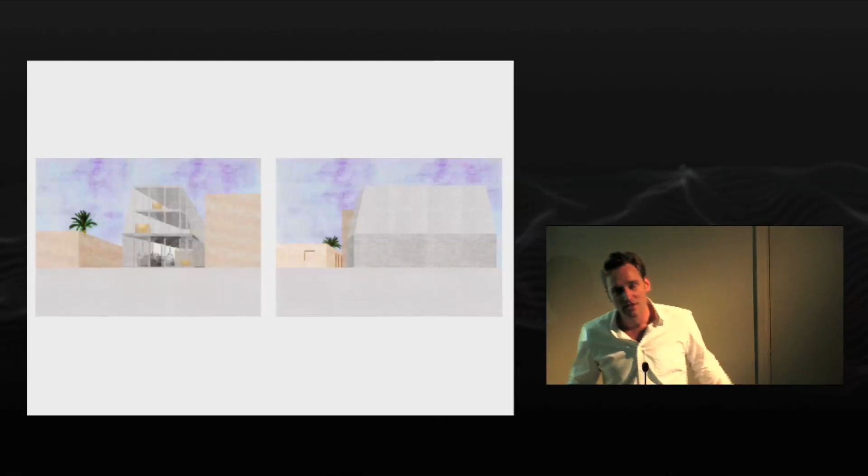And what we found interesting is that obviously it's full of new developments. We're not talking about a city that's been preserved 100 years ago. No, it is still alive. Buildings of 5 or more floors are being put in that same maze, and they are 10 meters high and so on. So we shouldn't make these old structures today. No, in our extension we make a building that is high, that has several floors. But it takes the idea of a house.

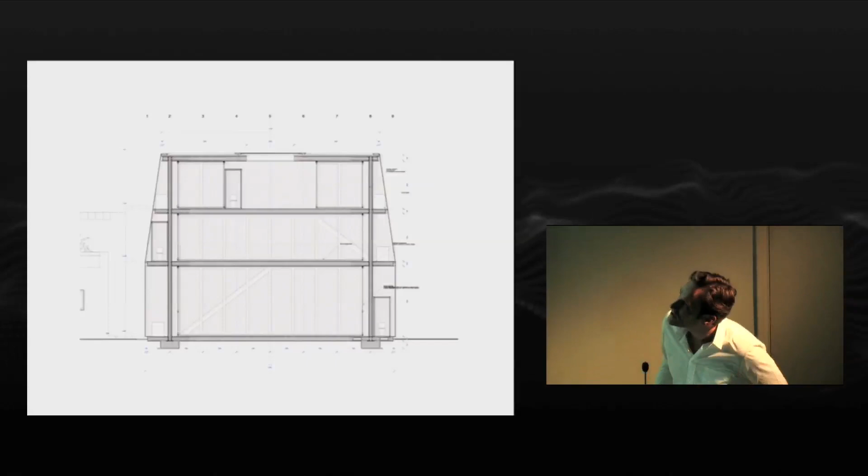It's almost like the Le Corbusier Dom-ino. I'm trying to look for the right image. So slabs and columns. That's it. The building is only about floor plates and columns supporting them, with some stairs going through them. And it provides space. Space underneath here, space here, and so on.

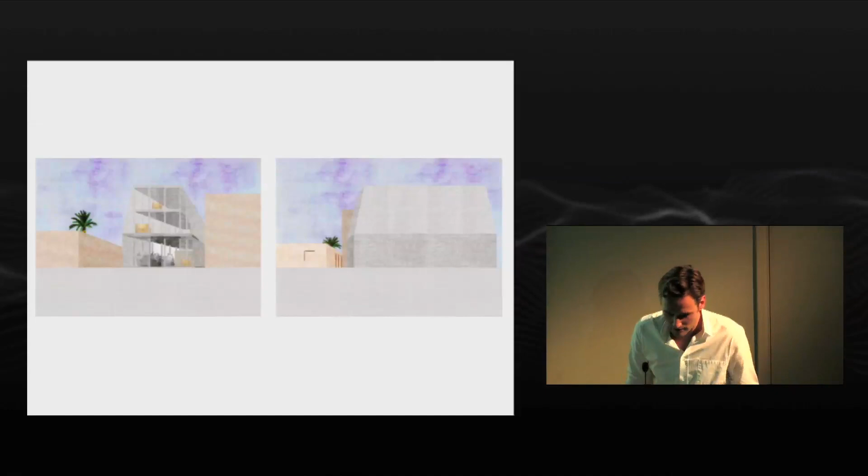And what is crucial is that in that climate, and then I have to go back, you also need to protect yourself from the sun, obviously, and the heat. And we just made a dress over the building, like a big garment or a cloth or curtain hanging over the building as such and making its tapered shape. And for the rest, it just had space inside. The plan is very simple.

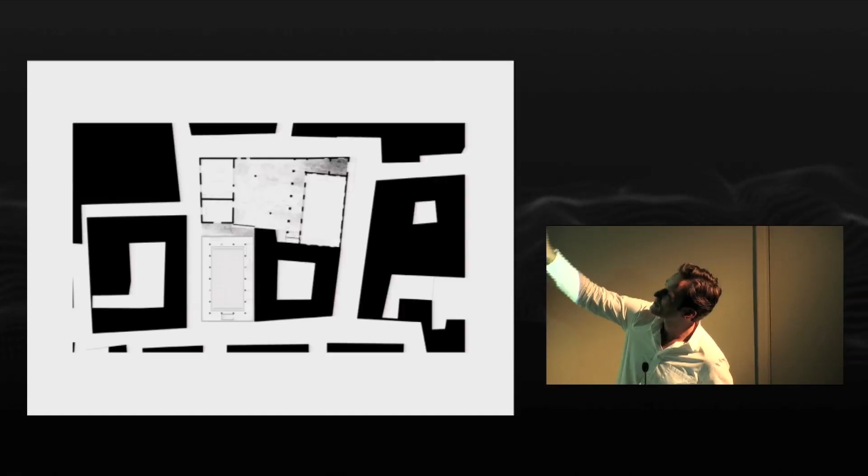This is the existing house. This is the addition we make. And on the ground floor, it relates to this maze of the Arabic streets. But it's also what they call a majlis. Majlis is the place where people can gather, or they play music, but also communities could use this space for meetings and so on.

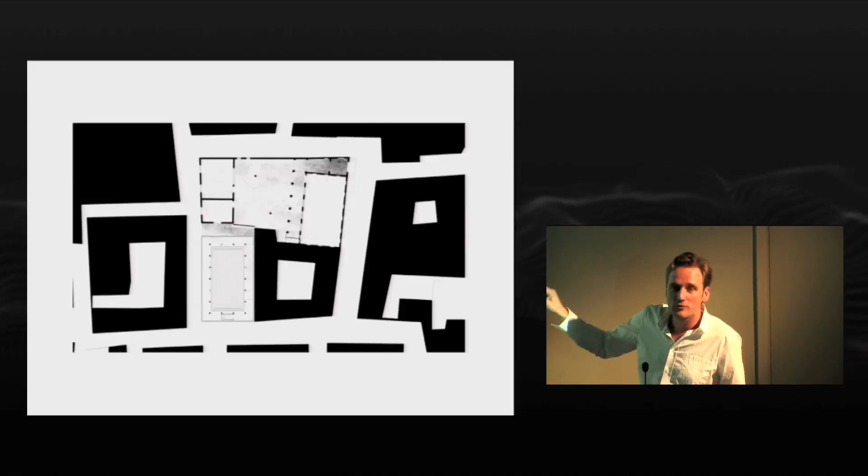The structure is not just columns. It's quite precise, almost like a temple put there to support the next slab. There's no bracing whatsoever, and there's only a pavilion standing inside, recessed from its facade here, so from the screens it's been dressed with, and it creates this intermediate climate, and this is the real inside climate.

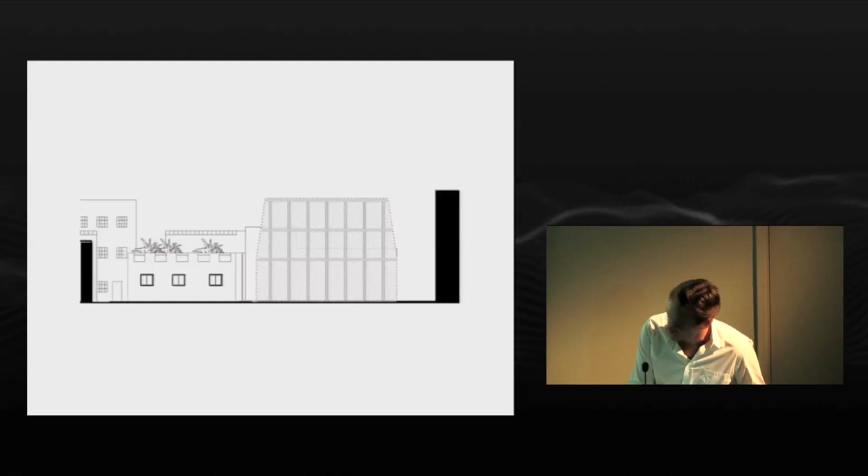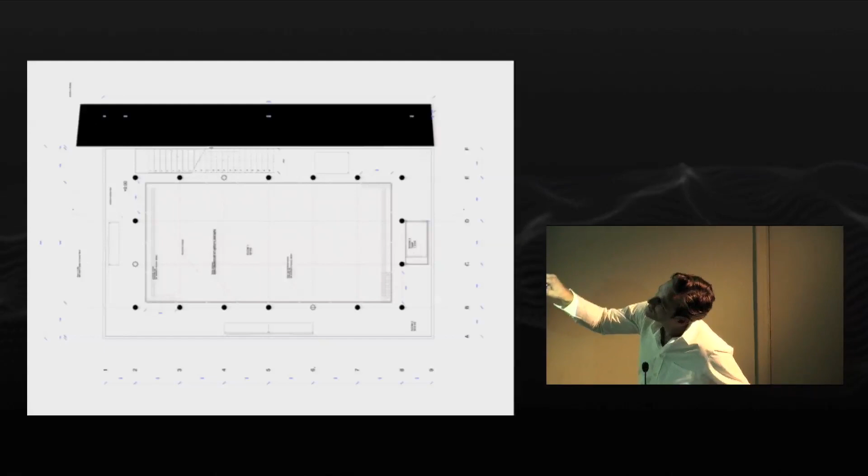In a facade, different floors again, and the different plans, so ground floor. And also all the extras like a toilet, some air cooling, cupboards, stairs, are all placed in this zone which has been protected from the sun, but which is actually outside. Each of them. And here you have the floors getting smaller for the typical shape that this building has.

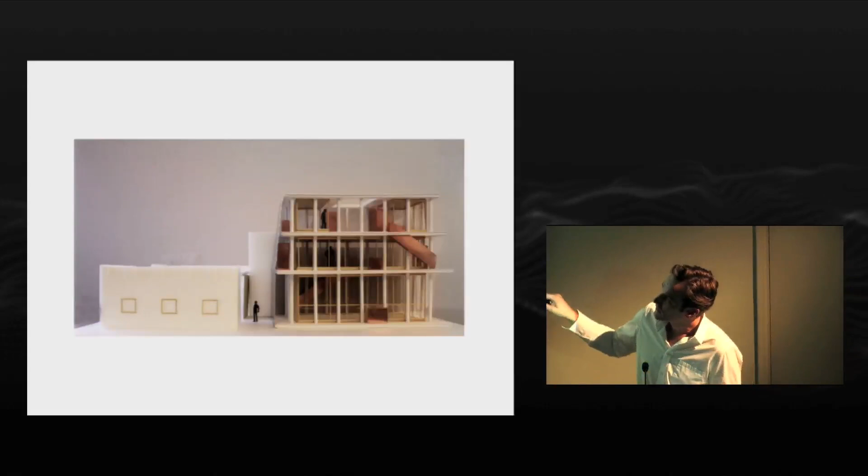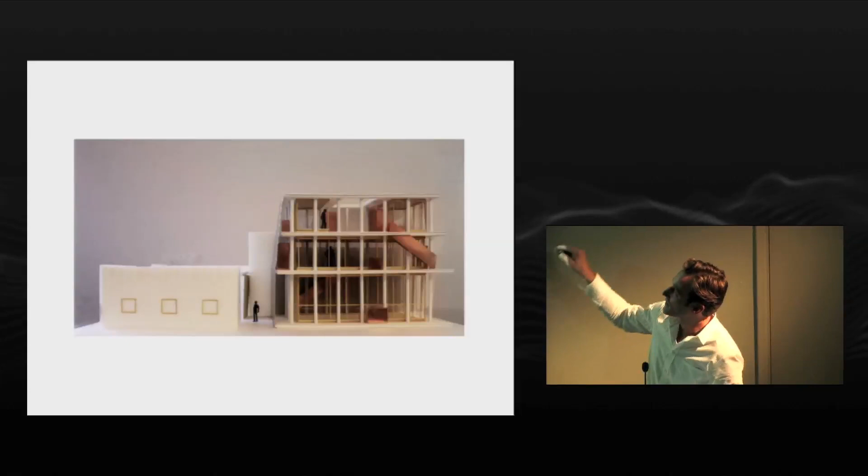The inside you can see this furniture, the box, and then the skin. And the skin, by the way, because it's a very flexible new kind of mesh we are now developing, you could also pull it up completely. So in the previous picture, this would be the daily use situation, let's say. But this whole side here and all 4 sides can be pulled up almost like a small theater. And then this inside, downstairs, becomes part of the street where, as a majlis, it could be a small concert or something like that.

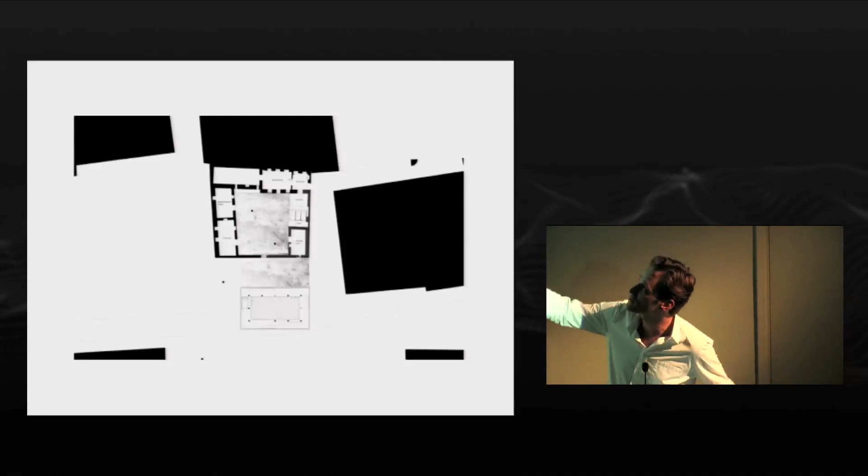And this is the second project. It's extremely similar, just a bit smaller. This is, again, a dar, as I was saying, rooms surrounding a courtyard, beautiful plants, 1 floor, made out of coral stones and lime plaster. An extension with a guest residence and also a majlis on the ground floor for music playing and so on.

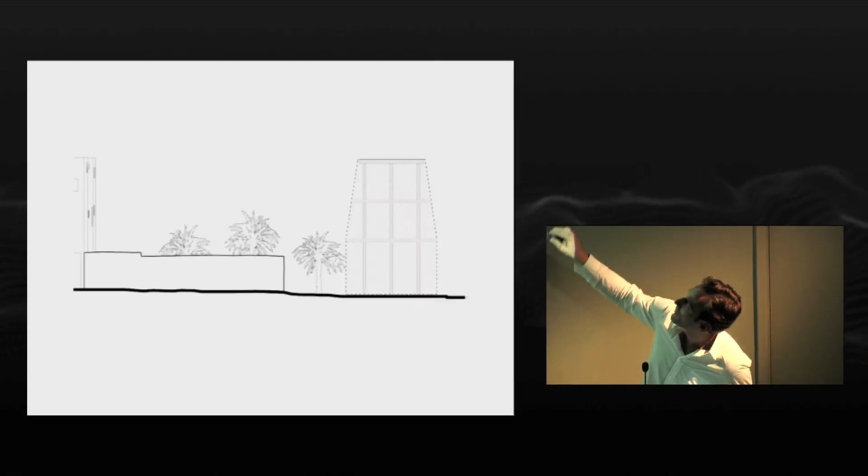And maybe also the old building, even older than the other one, framed by our new building and a neighbor which was reaching that height. The same detailing, just a smaller version. And its relation.